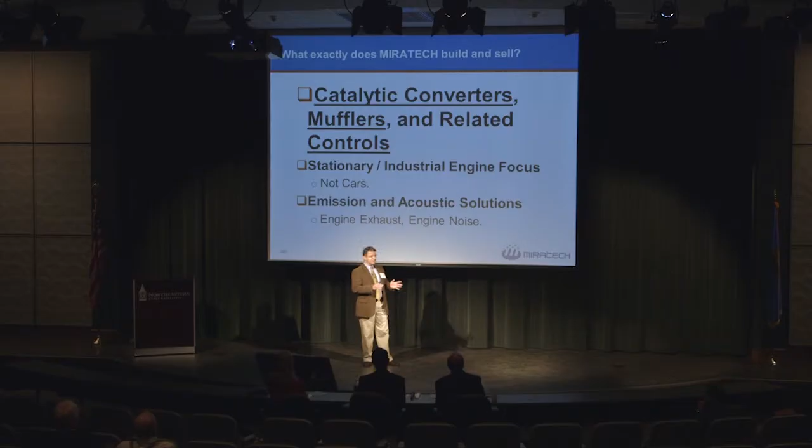Thank you for the opportunity to tell you a little bit about some of the work we're doing at Miratech. In broad strokes, very broad strokes, our business is designing, building, and selling catalytic converters, mufflers, and related controls. Our focus is on stationary industrial engines, so we're not dealing with cars because they're not stationary, and they're really not of the size that really interests us and fits our business. And our focus is on emission and acoustic solutions. So we're looking at the engine exhaust and the engine noise coming out of the engine and finding ways to control those.

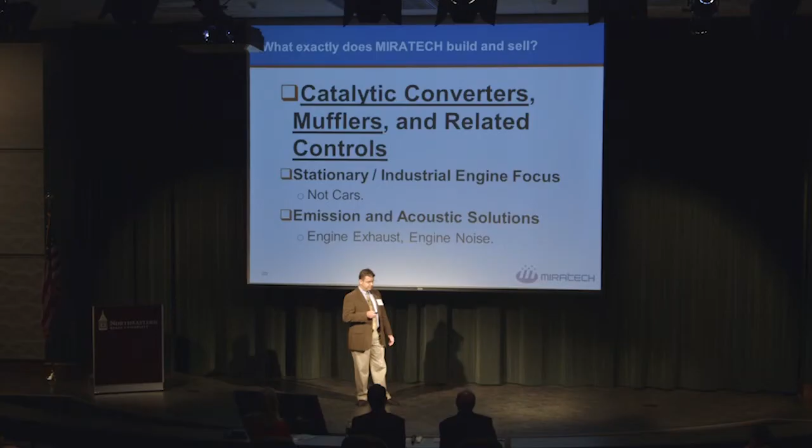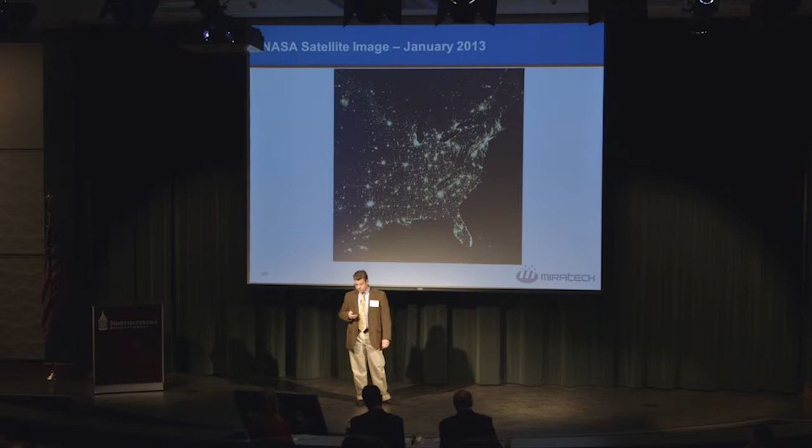One of the staff writers at NPR earlier this year was looking at some NASA satellite imagery of the US sky viewed from outer space. And one of the things they noticed is this big glowing cluster of light in the northern central plains of the United States. It's very big. It's as big as Dallas, Chicago, and a lot of major metropolitan cities, but it's seemingly out in the middle of nowhere. Well, it turns out what that is the Bakken shale play.

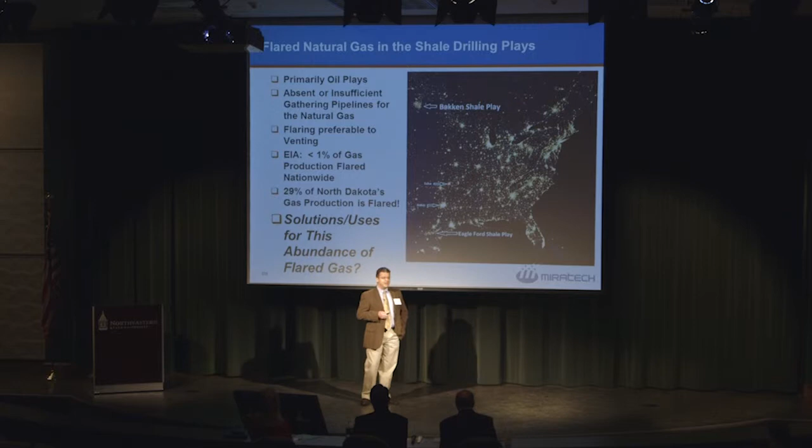It's flared natural gas from shale drilling plays in the U.S. And if you look down south around San Antonio, you can also see the similar flared natural gas from the Eagle Ford shale play. Now, these are primarily oil plays, so they're drilling for oil in these shale formations, but there is absent or insufficient pipeline infrastructure to carry away the produced natural gas that is also found with that oil. So flaring is what's done with this natural gas. Now, nationwide, about 1% of our produced natural gas is flared, but in the state of North Dakota, 29% of gas production is being flared right now, and that's tied to the Bakken shale play.

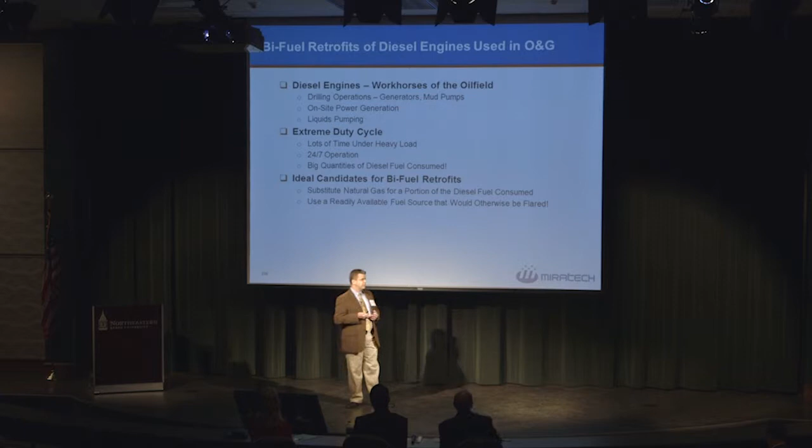So one would have to say there has to be a better use or a solution for this abundance of flared natural gas. Well, we think that one of the solutions is bi-fuel retrofits of the diesel engines that are used in the oil and gas industry. Now, these diesel engines in oil and gas are used extensively in drilling operations to power the generators and the mud pumps used on the drilling rigs, but they're also used for on-site power generation and liquids pumping in oil and gas. They're a great candidate because of their extreme duty cycle. They spend a lot of time under heavy load, they work 24/7, and they burn a lot of diesel fuel. And that's what makes them ideal.

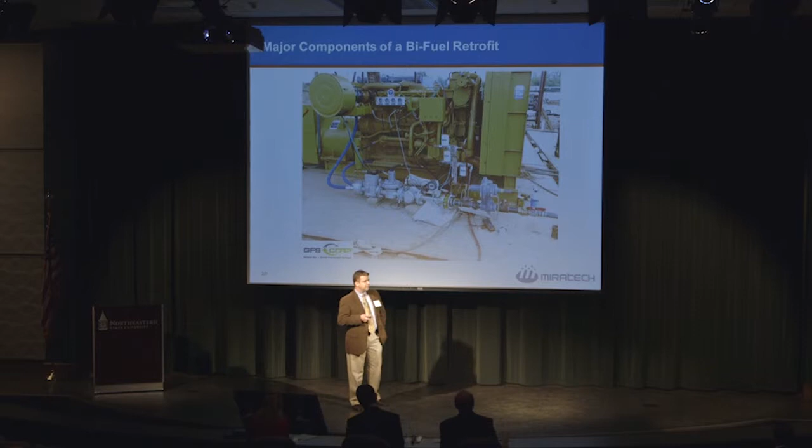And the bi-fuel retrofit will substitute natural gas for a portion of that diesel fuel consumed by the engine. And because it's on engines used in oil and gas, this fuel source is readily available at the well site, and it would otherwise be flared. So the bi-fuel retrofit is really pretty simple in terms of number of components. What you're seeing here is the fuel gas train. This is regulating and metering the natural gas that is being fed to the diesel engine as a fuel source. And these items right here are where the gas is going into the engine to serve as its alternate fuel source in addition to the diesel fuel.

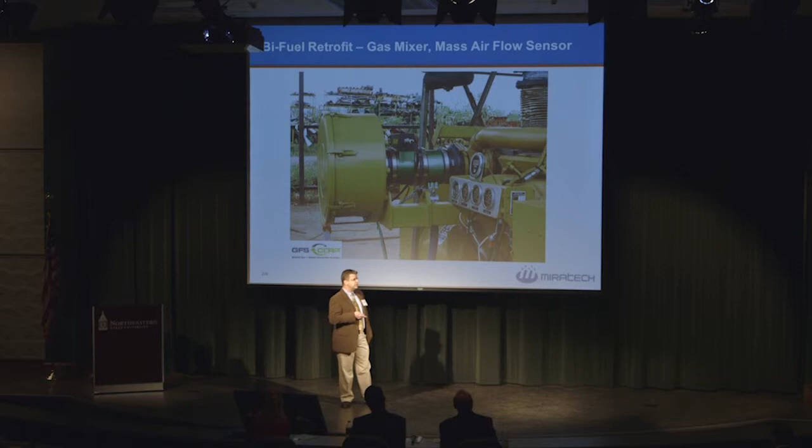And this is the human-machine interface. This is the control panel. So don't be fooled by the small number of parts and the apparent simplicity of the parts that go into this retrofit. There is a lot of knowledge intensity involved in the control system that makes these parts work and controls them to operate effectively.

So why is bi-fuel a big opportunity? Well, it's all about the money, and the fuel cost savings are significant, especially when you're displacing up to 70% of the diesel fuel consumed by the engine with natural gas. This allows you to extend the run times of the diesel engine on its existing fuel tank because that fuel tank was designed assuming 100% fuel consumption of the engine. This means less frequent fuel deliveries to the well sites, which puts a lot less wear and tear on our infrastructure to get the trucks there. We're using an available source that's right there, and it's a less carbon-intensive fuel source, so it should be lower exhaust gas emissions. Now, all of these benefits do not just apply to oil and gas engines. They also could apply to these engines used at data centers, backup generators, refrigeration containers, and more.

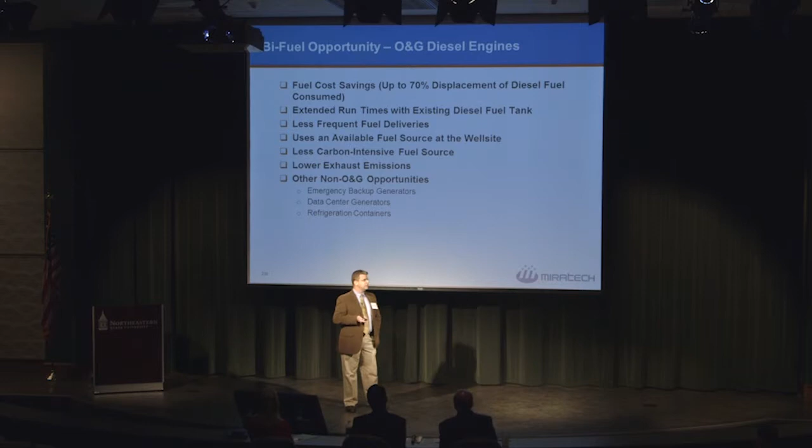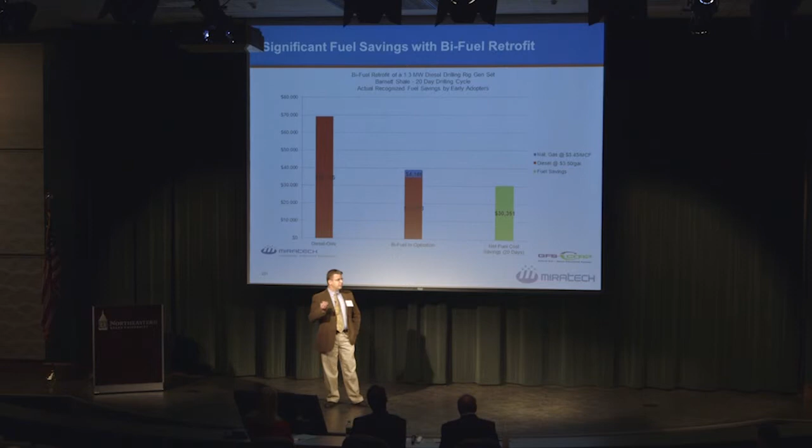This slide here details the fuel savings with a bi-fuel retrofitted engine. This data reflects the savings generated on a 1.3 megawatt diesel engine used in the Barnett Shale in an actual drilling program over a 20-day drilling cycle. The column on the left represents the current practice, with red representing the diesel fuel costs alone. $69,000 in diesel fuel costs on one engine over a 20-day drilling cycle. The middle column represents the same engine operating in bi-fuel mode, supplemented with natural gas. $39,000 in cumulative fuel costs. A $30,000 savings in fuel cost over 20 days of drilling with one engine, and there are typically 3 of these on one drilling rig.

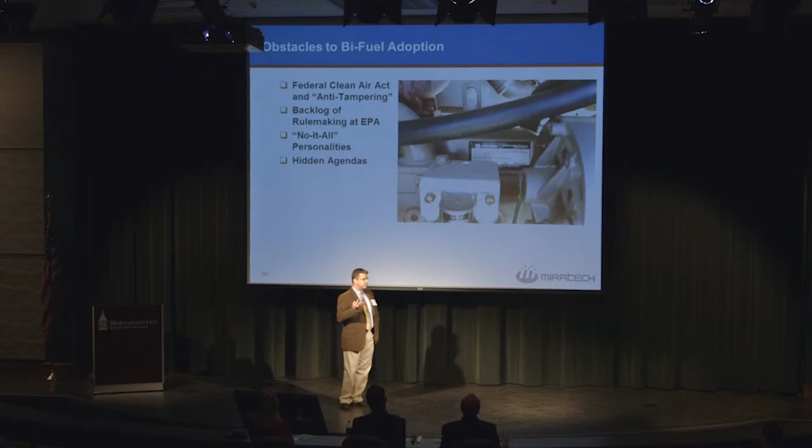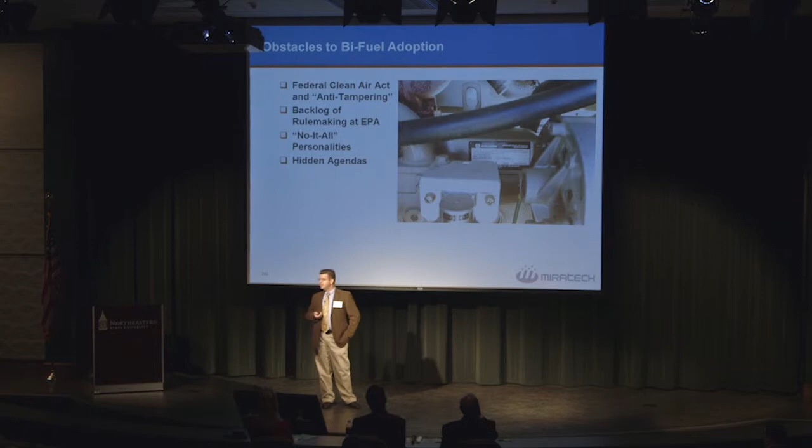So you would think, with project economics like that, so compelling, that everybody would be doing this. Unfortunately, there are obstacles in the path, and the big one is the Federal Clean Air Act. There is an anti-tampering provision of the Clean Air Act that is mentioned on this label that you'll find on engines that are manufactured. This provision had good intentions.

It was rooted at times when there was the option of putting leaded gasoline in a car that was meant for unleaded fuel. But it did not take into account the onset and the discovery of cleaner burning fuels and the ability to take engines with long useful lives and make them run on newer, cleaner fuels as they become available. There's also a backlog of rulemaking at the EPA that makes it very lengthy and very difficult to get an affirmation from them that this would be an acceptable technology.

And because so much of this is tied to oil and gas and fracking, which is a very polarizing subject, there are a lot of strong, loud, what I call know-it-all personalities that have hidden agendas because they don't like fracking, they don't like oil and gas, or they just don't like engines in general. So what is the path to expanded bi-fuel retrofits?

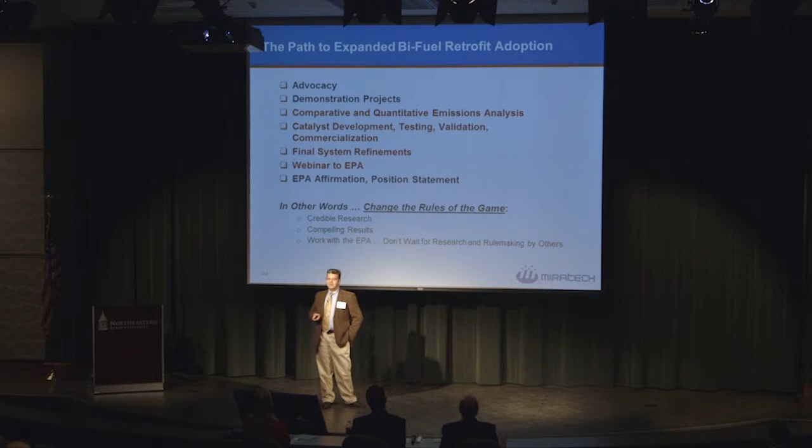Well, there are the obvious things of advocacy, demonstration projects, but our role at Miratech is really what you see in red here. We want to test the emissions on these engines, develop a product that could remedy any deficiencies identified in the emissions that were tested, and then promote to the EPA and get their affirmation that this is a viable technology and it does no harm. In other words, we want to change the rules of the game. We want to produce credible research, compelling results, and work with the EPA and not wait for them to contract someone else to do the research.

So here's a summary of what we studied. We looked at 4 engine operating modes of the diesel engine. We looked at the stock diesel engine running on straight diesel fuel, and then we looked at the emissions from that engine operating in the bi-fuel mode with natural gas substituted as part of the diesel fuel consumed. We looked at the emissions then with the Miratech catalyst applied in both modes of operation. We operated the engine over a variety of load points, and we tested multiple pollutant species that are regulated.

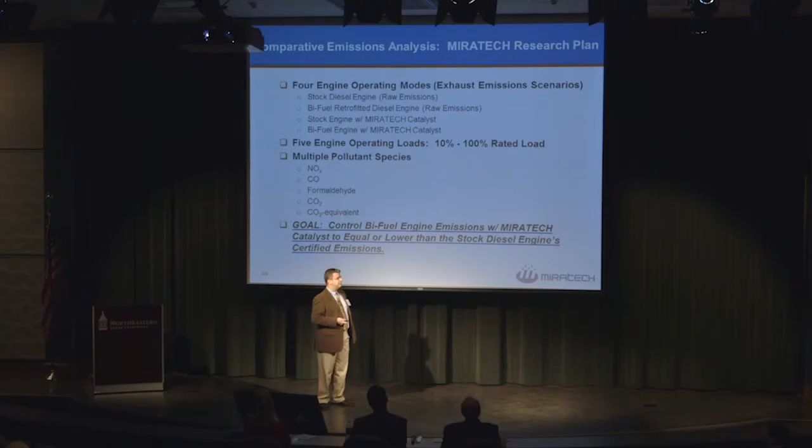And the ultimate goal of our research was to control the bi-fuel engine emissions with the Miratech catalyst to equal or lower emission levels than the stock diesel engine's certified emissions at the factory. That was the goal. And the next couple of slides summarize the emissions that we found. This shows you the carbon monoxide emissions in each of those 4 modes of operation. The main things that I want you to pay attention to are the red bar and the green bar.

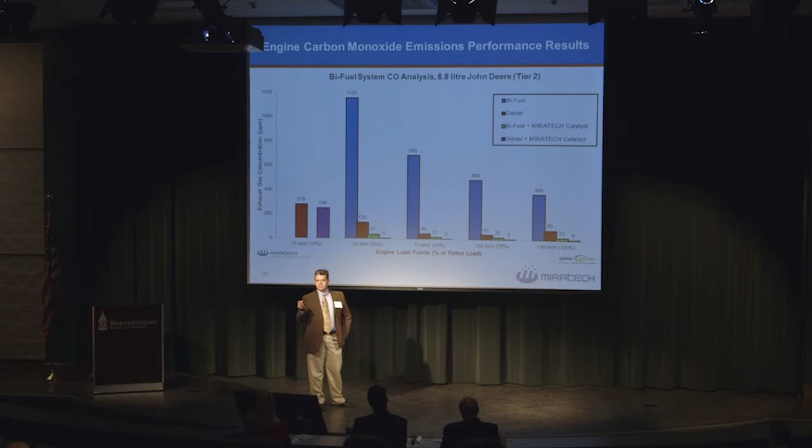The red bar represents the diesel emissions, the stock diesel emissions, as it would have been certified from the factory. The green bar represents the bi-fuel emissions when the engine is operating on bi-fuel controlled with a Miratech catalyst. So the goal is achieved when the green bar is less than the red bar. And you can see that at each of these load points, we have achieved the goal. We have a successful product.

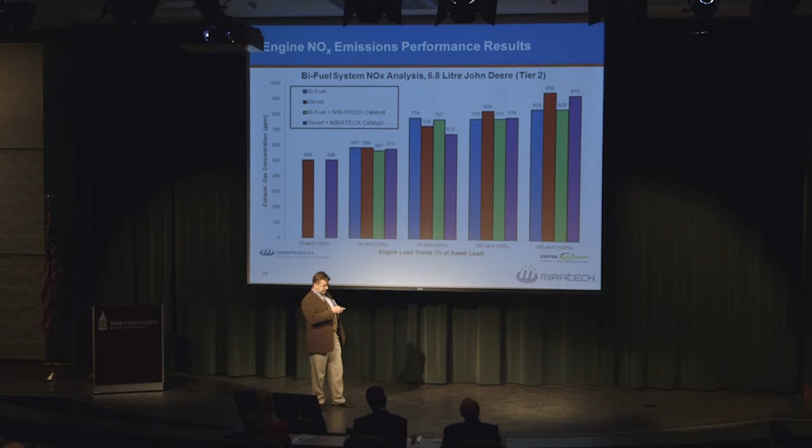We also tested the NOx emissions over the same set of scenarios. And again, the red bar represents the stock diesel engine emissions. The green bar is the bi-fuel-operated engine with Miratech catalyst. And when the green is lower than the red, we have succeeded. And in all but one load point, this middle load point, we have lower NOx emissions than we do from the stock diesel engine. And we think that we can remedy this one point with some simple tuning of the system.

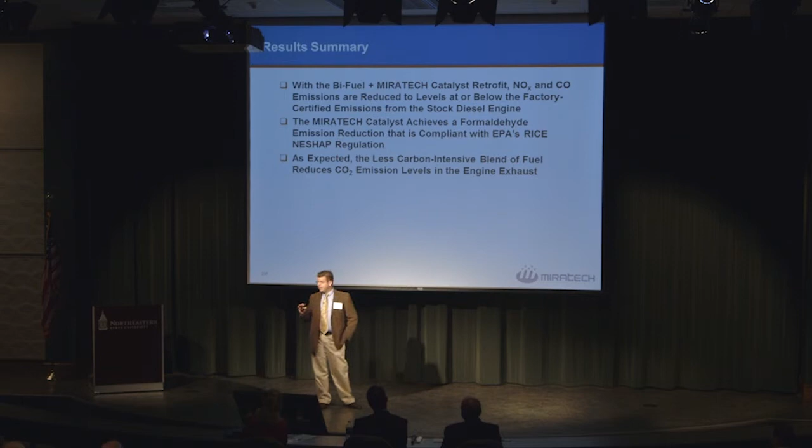So in summary, with the bi-fuel retrofit, using the Miratech oxidation catalyst, we can control the NOx and the CO emissions to levels that are at or below the factory certified emissions for the stock diesel engine. We also tested the formaldehyde emissions from this engine in these operations, and the Miratech catalyst achieves a formaldehyde emission reduction that is compliant with EPA's RICE NESHAP regulation, which affects stationary engines in the U.S. And as expected, because we're using a less carbon-intensive fuel blend in the engine, our CO2 emissions are lower as well.

So what are the outcomes? Well, there have been a lot of hesitant bi-fuel prospects out there that have not wanted to adopt the technology out of fear of the consequences of this anti-tampering provision of the Clean Air Act. But now, having seen the research and the results that we've demonstrated, they have the comfort and the confidence that we have a solution that will remedy any of those emissions problems by keeping the emissions levels below their certified stock emissions. It also presents opportunities for emergency genset operators to expand the use of their engines and remain in compliance. And we've commercialized a formulation that does it.

Drilling companies are recognizing significant fuel savings, and this puts a stranded natural resource to good use. And EPA has invited both of us, GFS Corp and Miratech, to present these findings this fall so they can see the results of our work.